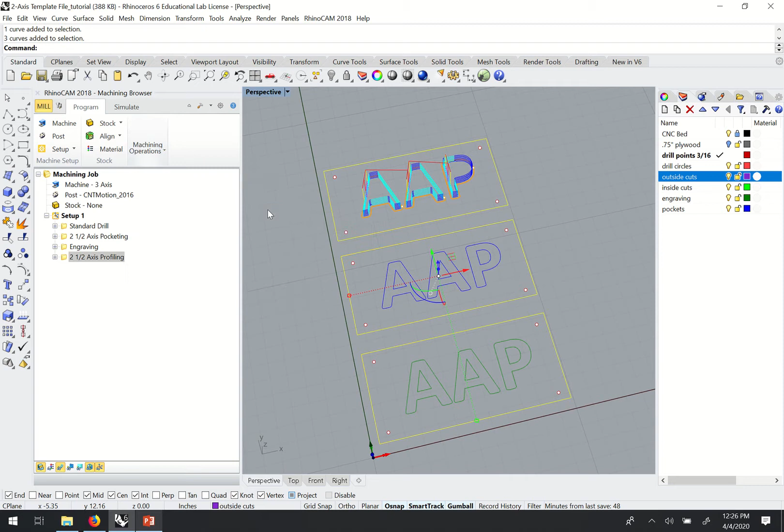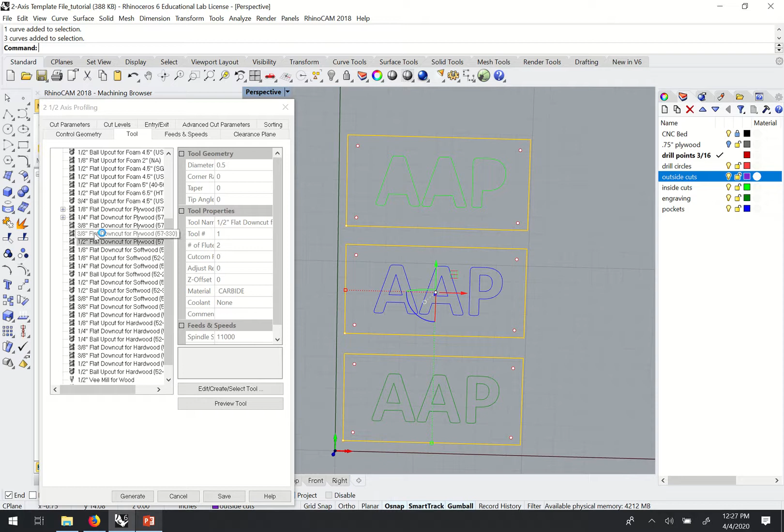And in this case, I'm just cutting on the outside of these parts, and I want to cut as quickly as possible. So I'm going to use my 1/2" flat down cut for plywood. So we have 1/2" or 3/8. The half should cut a bit faster. We may opt to use a 3/8 cutter only if we're spacing a lot of parts close together. The 3/8 cutter may be sort of a balance of how many parts we can fit on the sheet versus how fast we could cut them.

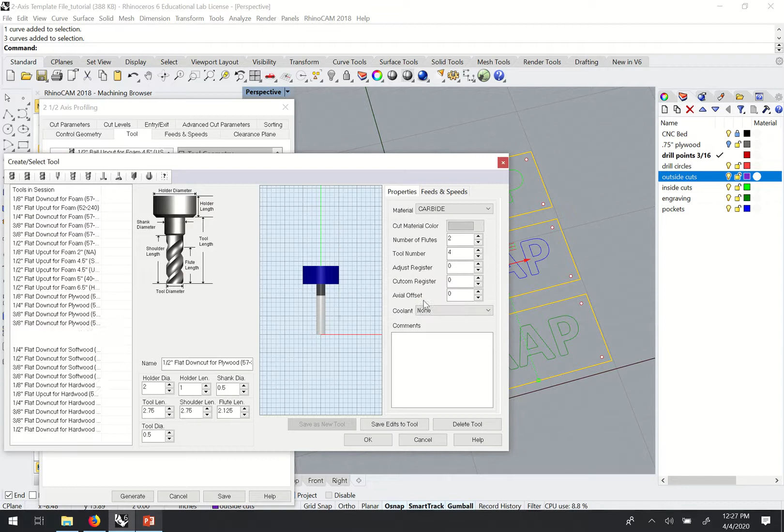So usually for cutouts in 3/4" plywood, we'd be looking at either the 1/2" or the 3/8 cutter for cutting those parts out. I'm going to use a 1/2". This will be, I think, our 4th tool. So I want to go in and change my tool number to 4. I'm going to save edits, click OK, click OK. Moving over to feeds and speeds, I'll click load from tool. The clearance plane stays the same.

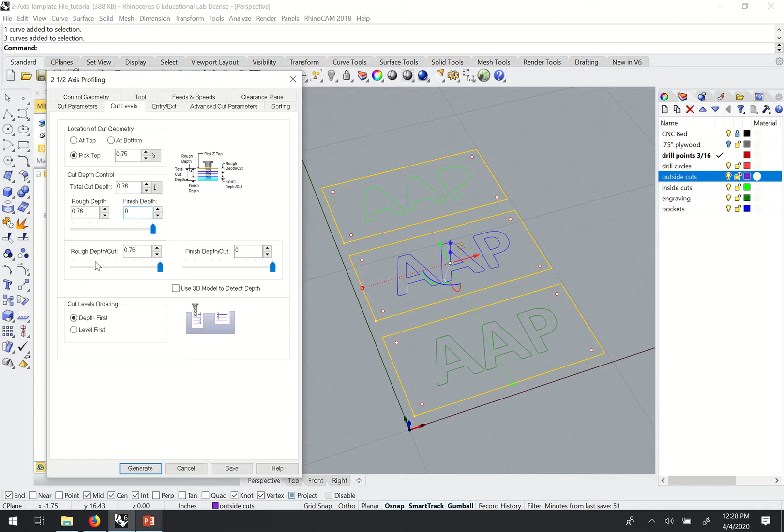Just like in the last, the inside profiling, inside cuts, we want to go down here and use inside outside, and in this case we're going to be on the outside. The next tab is cut levels. Once again we'll pick top 0.75. Once again we'll set the total depth to be a little bit beyond that. And down here in the depth per cut, now we're using a 1/2" tool, so we can cut up to 0.25 at a time.

Under entry exit, we're going to do along path, and we're going to change our path height now to match 0.25, the height of each cut level. We want none for the exit motion, and down here we'll click apply entry exit at each level. Right now I'm not going to worry about the adding bridges or sorting. Let's just generate and we'll look and see what result we're getting. So that looks pretty good.

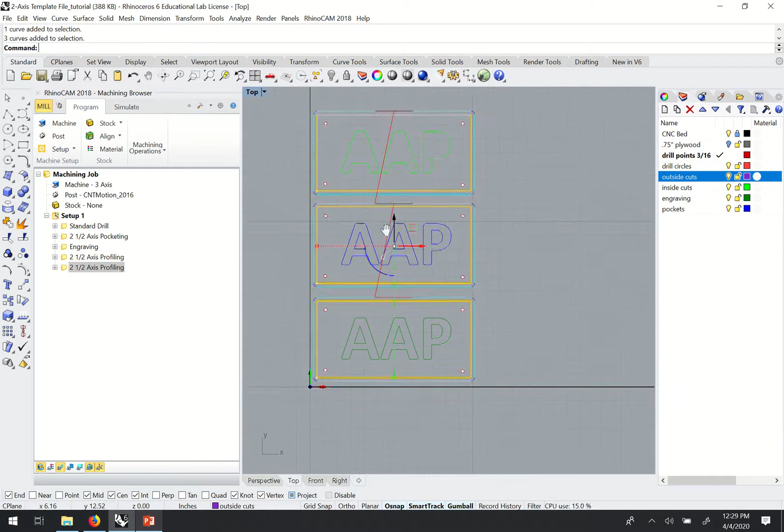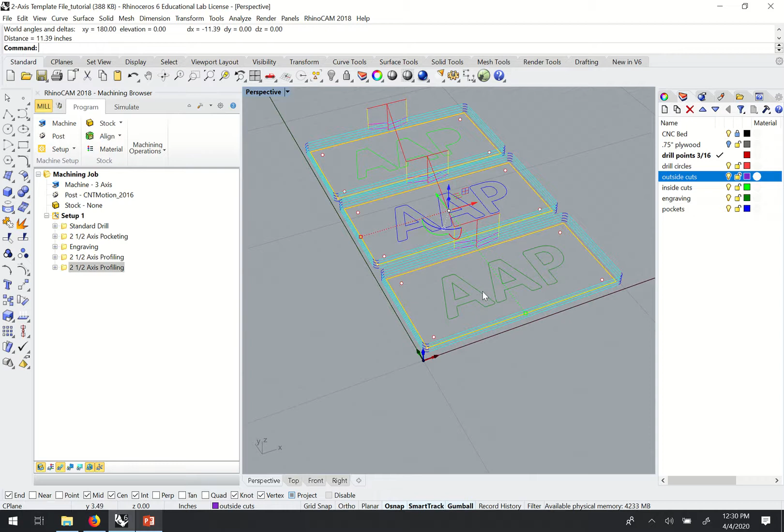You'll notice if I go into top view that these lines are pretty far apart, so there is some space in between these. And so whether or not we add tabs to this is all dependent on whether or not we think these would shift around. These part sizes are 5.5 by 12. It's sort of hard to say whether the vacuum would hold those down. To be safe, I might add a couple small tabs.

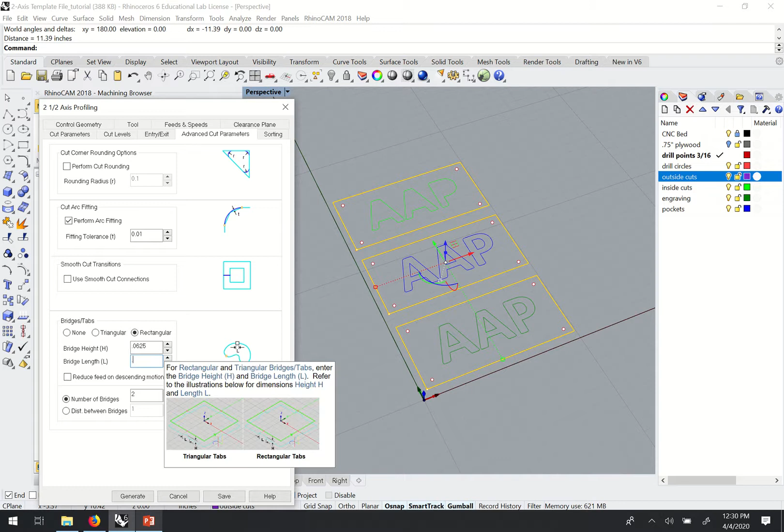So I may come back in here and, just like with the last one, do just a very small, in this case like a 1/16" high by maybe 1/2" long tab, and try just 2 of them. And so now you'll see that it's putting tabs on each side, and those would be pretty quick to just chisel off at the end of the file, and that would save us having to stop the job if parts were coming loose.

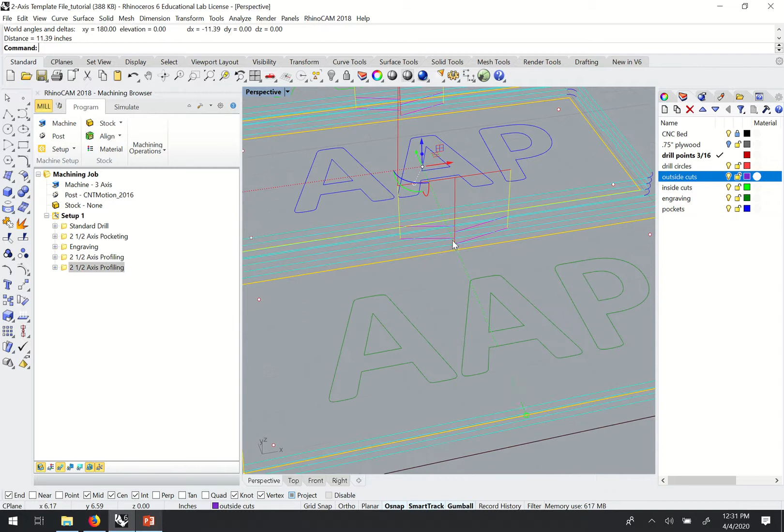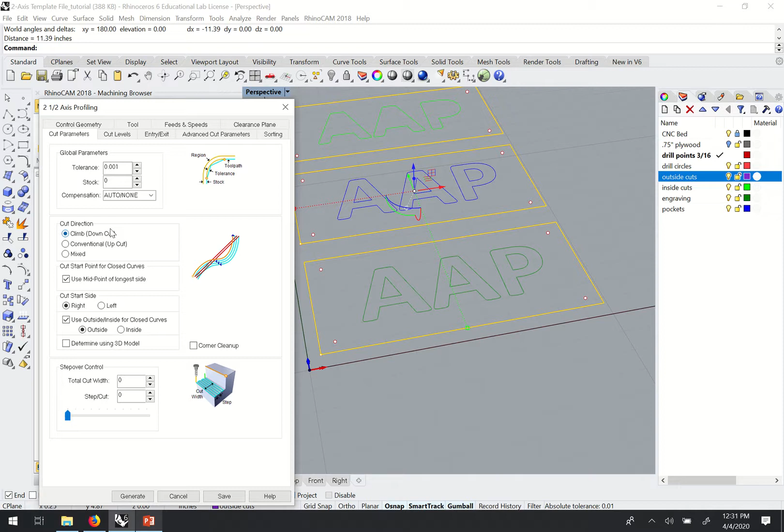One other thing you can see is that our entry-exit motions sort of come from opposite sides, so the machine's sort of going around this object in both directions. If we wanted to keep a continuous direction, if we double-click the profiling, we can set the cut direction. In this case, if you look at our tool, we're using a flat down cut tool. So if we set the cut direction to climb for down cutting tools, and then generate, you'll see that the tool keeps going in the same direction.

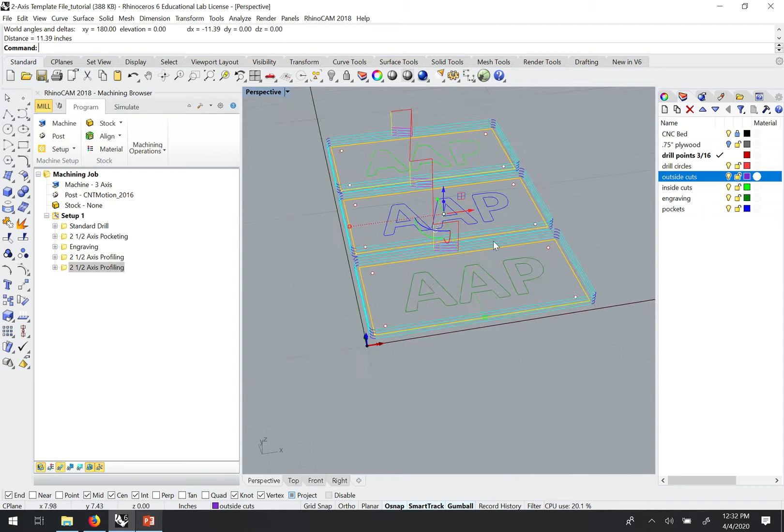It's not totally necessary, but sometimes going in one direction can provide a nicer edge finish on the edge of our parts where the tool is cutting always in the same direction. So that's the outside profiling. We'll pick up with some other tips and tricks, and also running a simulation of the program in the next video.